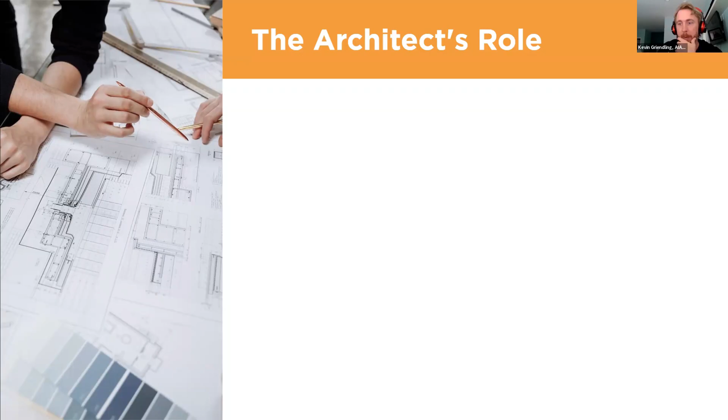What exactly is the architect's role when it comes to RFIs? Most importantly, our job is design intent. So if the storefront needs to be split, the RFI should be asked because the contractor can't really decide whether to just split it and have a column dropped in the middle, or if the architect needs to respond to some design schema on the elevation that this column now disrupts.

This is critical, especially on more complex projects using AIA contracts, where contractors are more understanding of this. They'll take it back to the architect to make sure that adaptive conditions are actually considering the design intent.

It is our responsibility to provide additional details where details are missing. One thing that probably stays in RFI territory without leaking into change order territory is flashing or paint colors. If for some reason an architectural set went out without any paint specified, usually there's a line item thrown into the bid for that. They'll put in a contingency item for evaluation of paint, and then ask in an RFI later about where the paint goes and what colors go where.

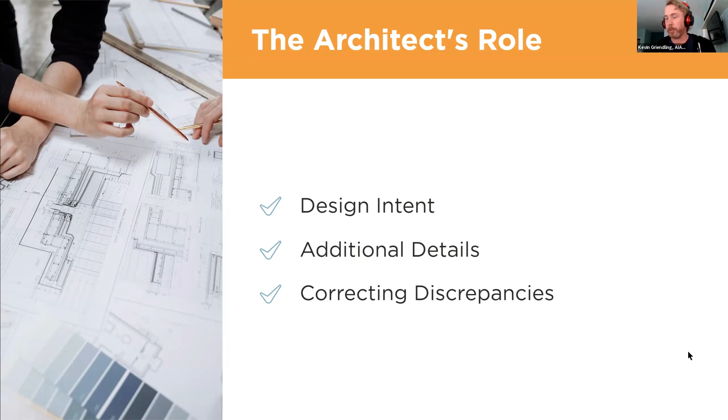In many cases they are asked, but it doesn't always come through as an RFI. We'll get into whether it's an ASI or an RFI in a moment, but I want to outline that RFIs are generated by the contractor. If these things are discovered by the architect instead, they're oftentimes going to be an architect's supplemental instruction. After those two things is when it would ultimately become a change order, if there's a dollar value attached to it. So that's good contextual knowledge.

Cool, yeah. I need to move some windows one moment. Okay, cool.

So the RFI process is not so different from so many other things. Now that you're jumping into construction, you're probably familiar with this. You'll have some sort of user interface, most likely, if you're using Newforma for construction administration. You'll get an email saying the contractor has sent you an RFI. If not, you may just get an email with a PDF attached that says, here's this RFI. If you're working on a very small project—I've worked on ice cream shops and donut shops—they may just send you an email, and that is the RFI.

What you need to know for the ARE is that it assumes this is an AIA contract project, meaning they're following proper construction administration protocols. So they'll send you an RFI, and there are some best practices attached with that—we'll talk about some of those too. You'll receive an RFI either through Newforma, through your email, or some other form.

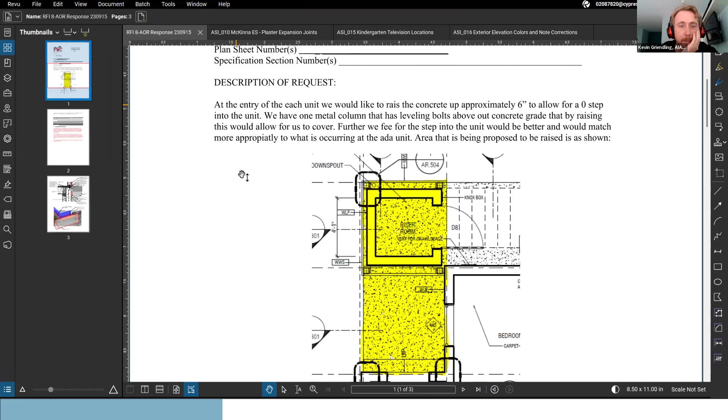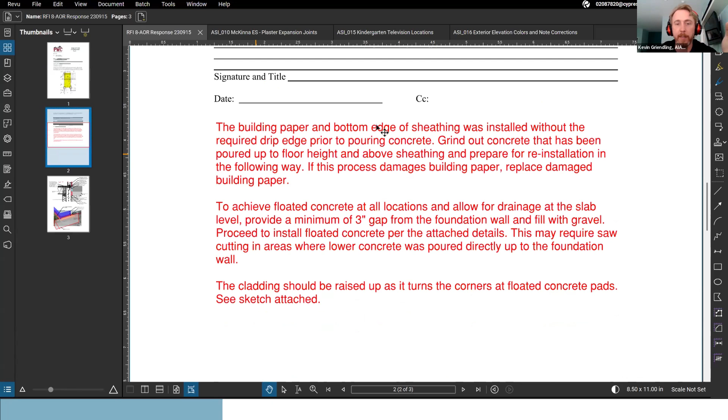So basically I'm going to pull up an example. This one here was an RFI that came in about a fire riser condition, and basically an entry step condition—it's all concrete. They wanted to raise it 6 inches. So when I talk about a narrative response and a graphic response, this is a narrative response that says this is what we need to do in order to respond to your question. But then I think it's critically valuable to include graphic responses too.

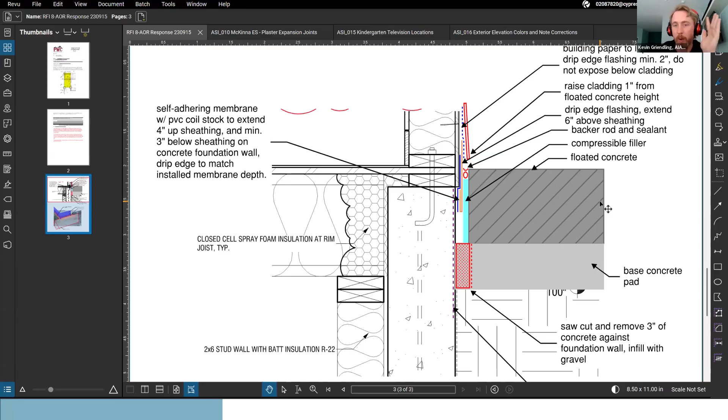We actually modified via a sketch the detail that was in the construction documents. It's not a super high-end, drafted response—it's a sketch. Oftentimes in architecture, in construction administration, this will have a title block labeled SK01. We didn't need that level of granularity for this project, so I just issued it as a graphic attachment to my response on the RFI.

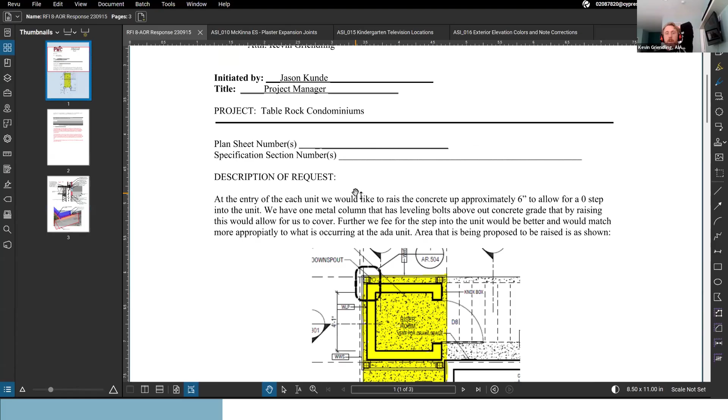You'll see that happen in a few different ways. Some firms will issue sketches only, where anything modified in the drawings after the first addendum, after bidding, will just be issued as a sketch. They never modify the drawings themselves and reissue sheets, whereas this is more of a practice particularity.

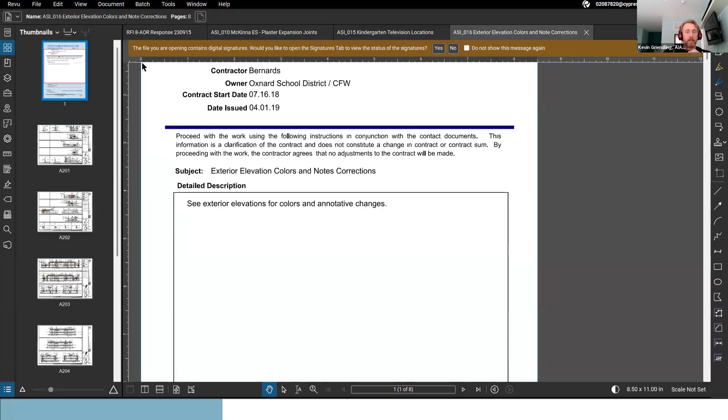I issue full sheets. You'll see here, this is an example—this one was an ASI for exterior elevation colors, where I went through and changed all the elevation color callouts to be corrected, and I issued it as a set of full sheets.

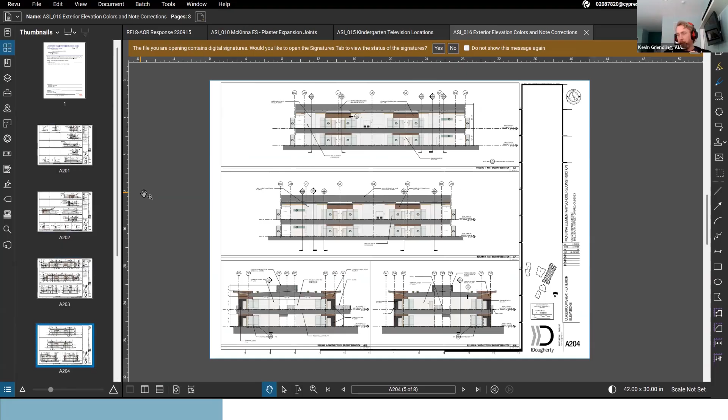For me, I like to make sure my drawings are always up to date with any change that has to happen, wherever possible, where a project requires it. That's not always true—like when I'm working on really small retail locations I've worked on, it's just not worth it. Just do a sketch instead. So that's a sketch.

Let me think about this from the ARE perspective. The ARE most likely will follow the sketch protocol, where a sketch is issued. I don't think it says it's wrong to issue a new sheet, but the official process currently practiced at like the AIA level for construction administration is to issue sketches whenever there's a graphic change. So they'd be inclined to issue sketches rather than update the sheets themselves. Correct, yeah. Okay, that's a good one—I need to dig into that and figure it out for sure.

I'd say it's a relatively new practice to update sheets. It's also very industry dependent—some industries, like DoD projects for instance, won't let you do that. They want sketches. So since that's the traditional approach, I'd say if you don't know on the ARE which approach it should be, go with the more traditional approach, which is issuing sketches.

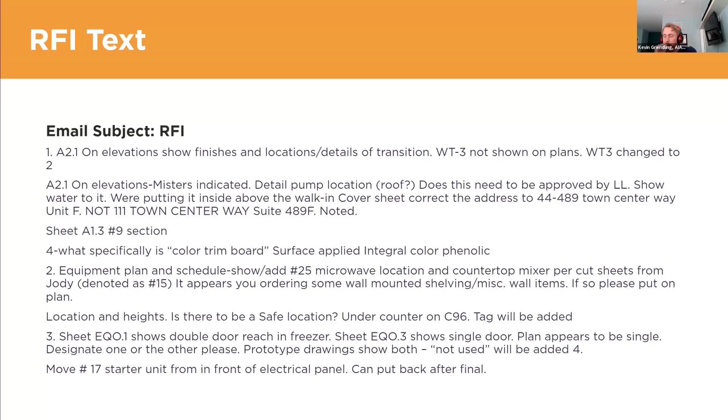My advice would be just try to respond to this as best you can. If they get it wrong, it's fairly defensible in a lawsuit situation because this isn't really admissible, clear communication, so it would be understandable that an architect might not respond to it purely accurately. But on the ARE, and in real practice when working on an AIA project, it should look a little more like this.

In this case, there were a lot of affected door marks, so they wanted to list them all. But if they're asking a broad question - all the exterior doors on the project are listed as wood core doors, did you mean wood core doors, or are they supposed to be hollow core, per my understanding and expertise? - then you could respond by saying, yes, all exterior doors should be hollow core.

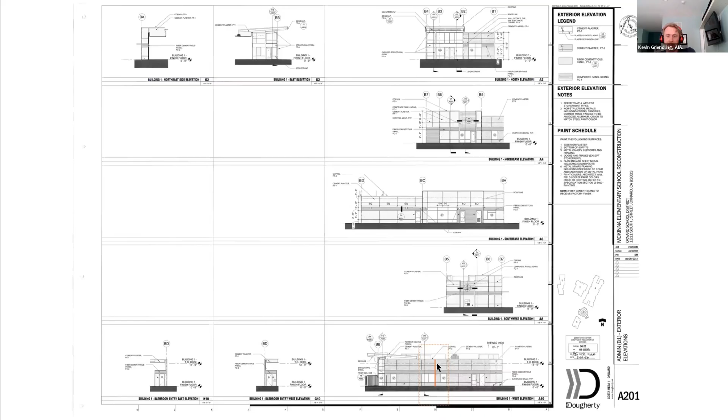So here's an example of an ASI. I talked about expansion joints, but this is a time where on a project we basically missed a few of the expansion joints. This project's budget was about 38, 39 million dollars. So when we got through here, you can see this orange down here, there's an expansion joint we missed and wanted to add there. There's another we missed, wanted to add here, missed, wanted to add here. And there's one more we missed and wanted to add there. So there's like 4 or 5 expansion joints on a $38 million project. That's not a significant cost line item.

And this is really critical. This is where the judgment call really comes into play. In practice, judgment is important for these sorts of things, but on the ARE, you can rely on the fact that the magnitude of these judgment calls should make the answer relatively obvious.

I'll give you a good example. I was working on a project, not unlike this one, maybe a $50 million project. We had 2 or 3 hospital system executives, 2 or 3 project managers from their side, a principal partner from the contractor, 2 project managers, 2 project engineers, 2 principals from my firm, a project manager, and 2 technical staff in a meeting room.

And we're all talking about a curb cut. We had this maybe 20-minute long conversation about whether or not it should taper or be raised up to the cut where the detectable warnings are. We sat there for 20 minutes, and then finally the project manager of the contractor said, 'Guys, this is like an $800 item. You either want it or you don't. Just make a decision, because we've spent 16 times that just sitting here talking about it.'

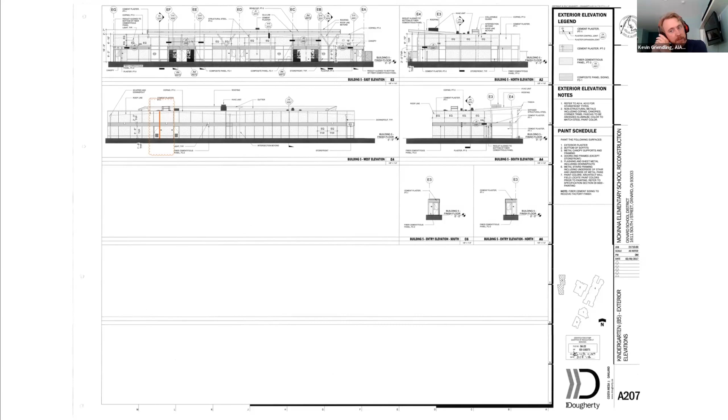I have one more example, and then I want to talk about open stuff. Oh, that was the only example in there. What did I want to pull up?

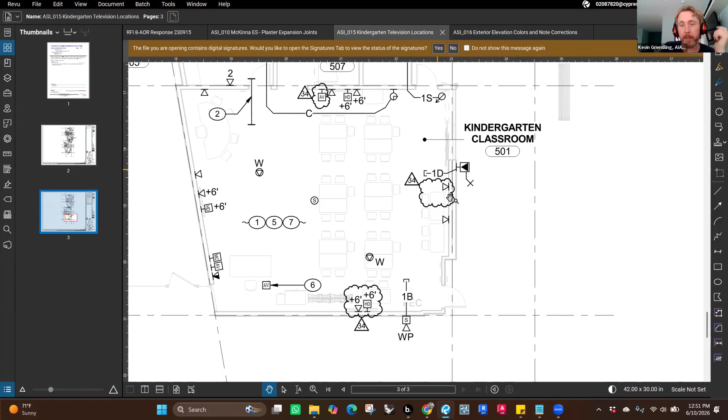Oh, here's the television locations thing. The correct television drop locations weren't shown in the electrical drawings, but they were in the architectural drawings. We caught that during construction, and recognized that as the electrician is going through doing their work, they're going to run all the conduit to the locations shown in the electrical drawings. So we sent an ASI, a non-material change update, where we relocated the location of the TVs and updated them in the electrical drawings, but we didn't need to update them in the architectural drawings. That's why we sent that one.

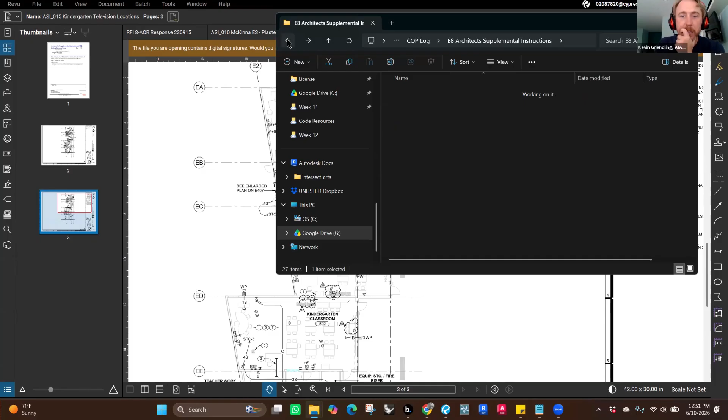Another reason why it's important to have different threads for each topic is because it's easier to find the information, right?

I can now look through all of the RFIs on this project, which again was about a 38, 39 million dollar project, but this wasn't even the end of it. We had 343 RFIs. Could you imagine if I was trying to find the response to where we moved a sink 2 feet to the right in some casework RFI, if I didn't have a record of what each RFI was about? That would be a nightmare. So that's why we try to make sure the subject matter of each item is pretty well described in the title of the RFI.

I just have PDFs of this, but if you have it in Newforma or some other construction administration software, it's going to look the same way. The subject should read pretty clearly what that RFI is going to be about.

So that said, I can pull up any of these items if you'd like to explore a little more what these could look like. If you have specific questions, I can try and find an example of an RFI or an ASI that speaks to your question. What questions do you have?

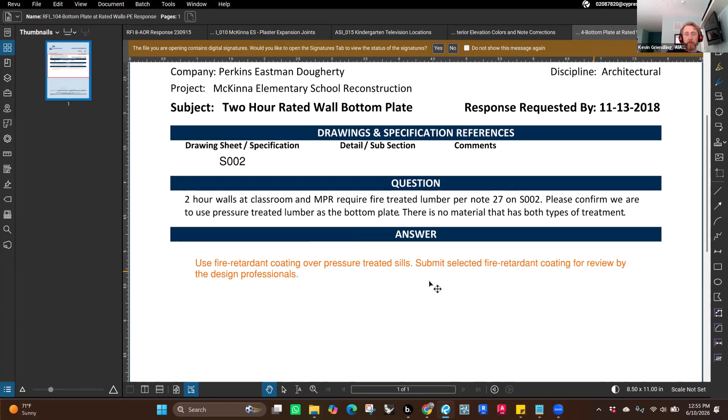For instance, the first one is rated wall bottom plate—use fire retardant coating over pressure treated sills, submit selected fire retardant coating for review by the design professionals. So then they submitted it, and that's what this is. We said provide product data as part of a submittal. It's rare for RFIs to go further unless you request something, but if it isn't clear enough, just close the RFI and have them re-ask.

In that case, would it still get logged as its own number? Well, it depends—I should revise my statement. If it was something like four different disciplines, I would respond by saying break these disciplines apart and submit a separate RFI for each one, and then close that RFI. If it was about the pendant lights or something and I just needed something else asked, I would call the contractor and say can you update this, and then keep that RFI number—I'd just replace the RFI with the new updated one.

Because for me, what I don't want is a gap where it jumps from like 94—or here, well, there is a 93, it's just out of order—but I don't want a gap. I don't want to see 80 and then 82 and not know what happened to 81. That's critically important to me.

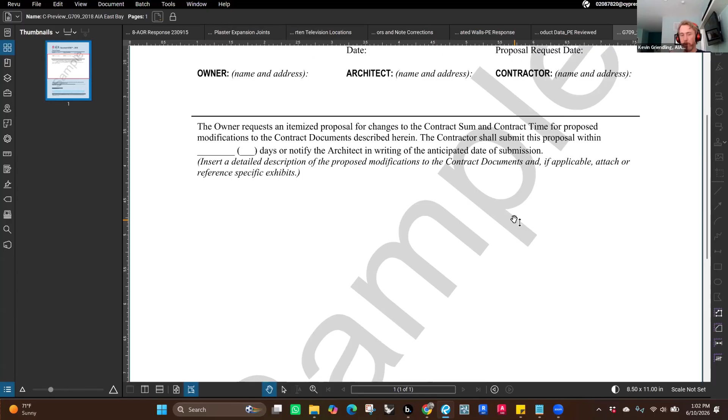So it does the proposal request step, and once it's approved, it becomes a change order. The contractor loads it into their system and says this is now a change order on this project for X number of dollars, and then they can bill against it. Yeah, I knew there was something weird about the contracts with them.

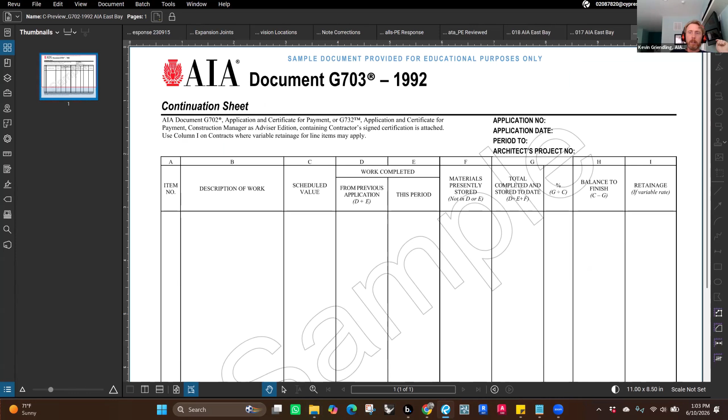I just want to double check these other ones, which I think are all RFI ASI things — continuation sheet, payment, change order. There you go. So G701 is the change order, G709 is the proposal request. The owner submits the proposal request, the contractor responds to it, and then the change order is filled out and approved.

Got it. And would we have to memorize these form numbers? It's valuable to spend time with them, but they're not complicated forms. This is pretty clear — it'll tell you in the question, it won't just say G701 and ask what you do with it. It'll say the contractor has submitted change order AIA document G701. So no, you don't need to memorize this, but it certainly doesn't hurt to have a functional base understanding of it.